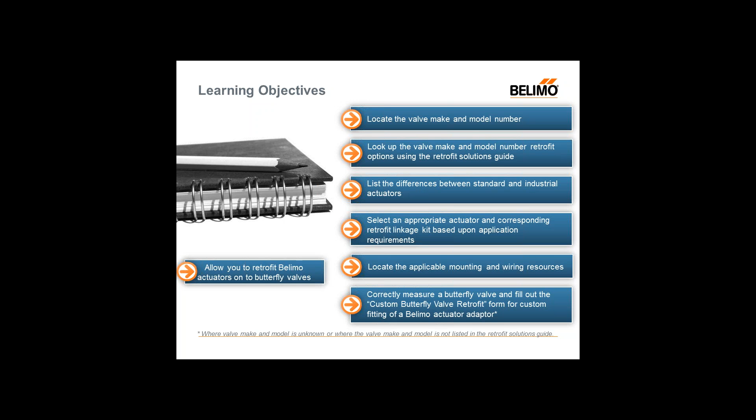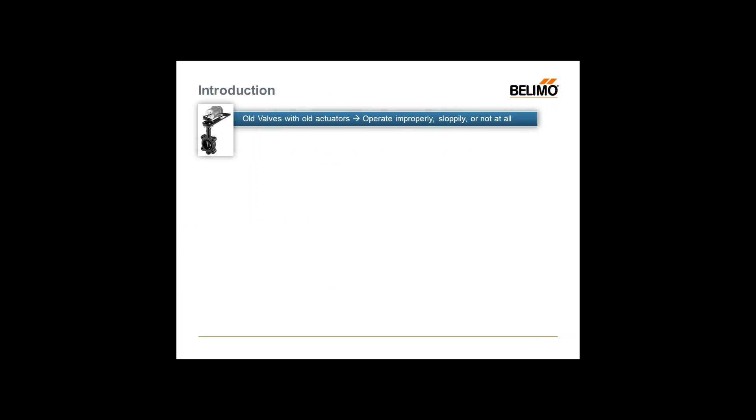So without further ado, we'll talk a little bit about the why, the introduction, or why you might want to retrofit. Of course, there are many reasons. Some could be labor, some could be size. In your building you have all these old valves with old actuators, and some are running improperly, sloppily. They don't run right, they're wasting energy, performance is pretty bad, and you start thinking, why would I retrofit over replacement?

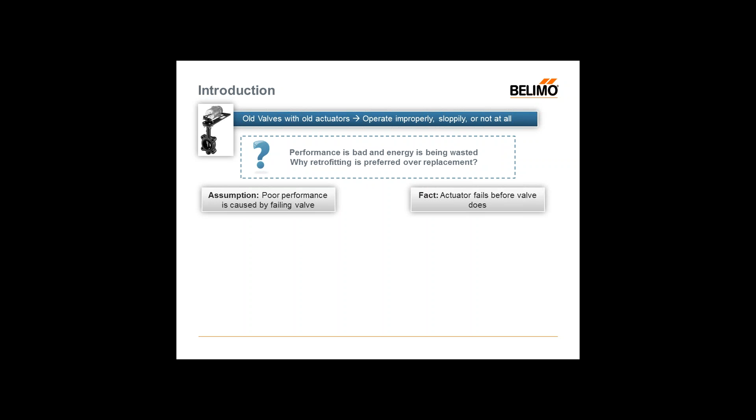There could be a host of reasons why you might want to put in a full replacement, but if we're focusing on retrofit as an option, you start thinking the assumption is that the poor performance is probably caused by the valve, since that's what the media is passing through—that's got to be what's really causing it. But reality is that many times it's the actuator. The valves are pretty robust; most of us in the HVAC market know the valves are very robust as far as longevity. It's the actuator that tends to fail before the valve, after all they are just electronics, or in some cases pneumatic.

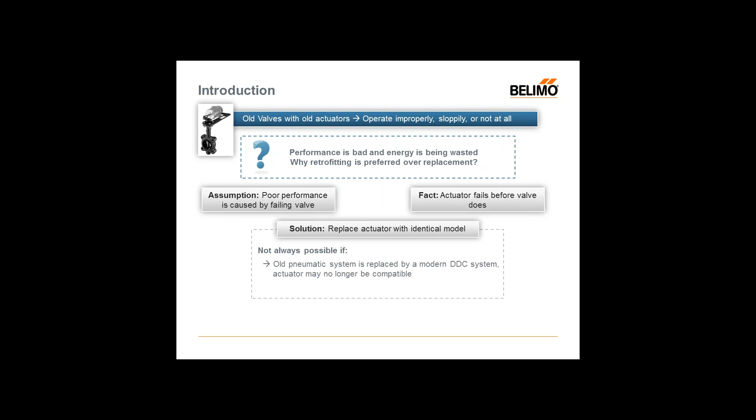So the idea would come to mind: simple solution, replace the actuator with the identical model. Might not always be the case though. Things like going from a pneumatic to a DDC system—there are different transducers you can put into the system, and they're a little bit harder to work with. But if you're updating your whole system to go fully electronic, state-of-the-art, let's say with BACnet and things like that, you might want to reconsider going to a state-of-the-art actuator. Sometimes a lot of these older actuators are obsolete, so just getting a like-for-like when you approach the company—this is the model I have—there might not be a replacement for it.

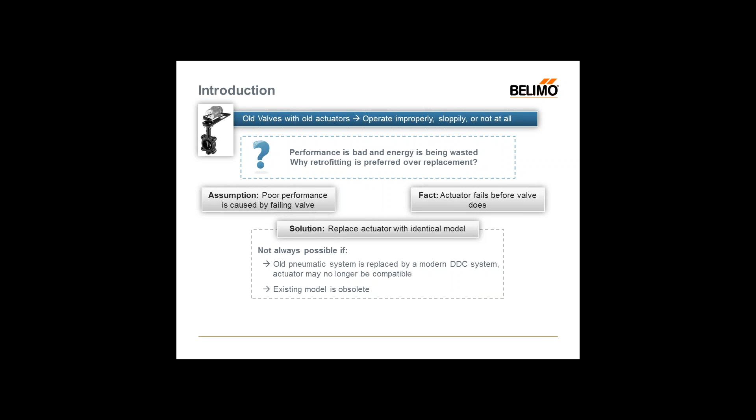The real idea, the bottom line, would be to replace the actuator with something state-of-the-art, maybe energy efficient, get better control, save some water and energy or media, and ultimately have better control of your system. Better control could equal better comfort, and that's really what we're shooting for these days.

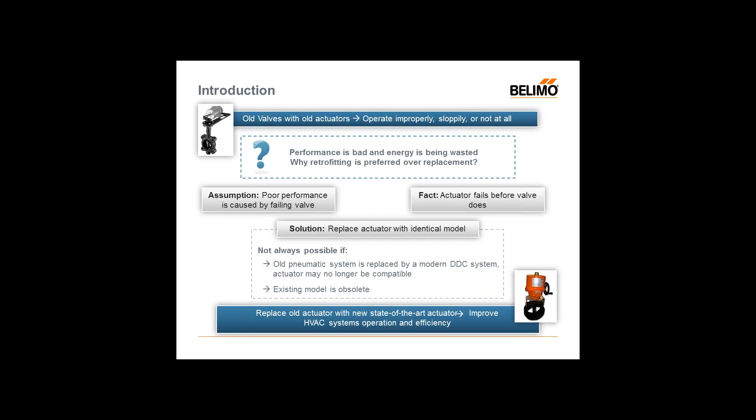So step by step, as far as retrofitting a butterfly valve, these rules kind of apply to any type of valve, whether it's globe or ball valve. It really starts with the valve make and model. We had one of our customers, might be on the line right now, send us an email last night asking about a pneumatic actuator. Although that information is helpful as far as what the actuator was, we really need the valve information. We're going to be choosing or manufacturing a linkage that fits on that valve, so we really need to know everything about the valve, not so much the actuator.

From there, you take that data and go into one of the resources. One is the Retrofit Tech Doc, which you see in the handouts. Another could be our Select Pro software, or even our new Retrofit app. From there, you'll have multiple choices of linkages. You'll take some actuator considerations into account, why you might pick one over the other, then select it and purchase everything. Generally speaking, a lot of our kits are available within 2 to 3 days, unless they're custom—those take about 5 days.

And when you receive it, install the linkage, hopefully in a few minutes, and get your system back up and running with no hassle or downtime—and ultimately, without removing the valve from the system.

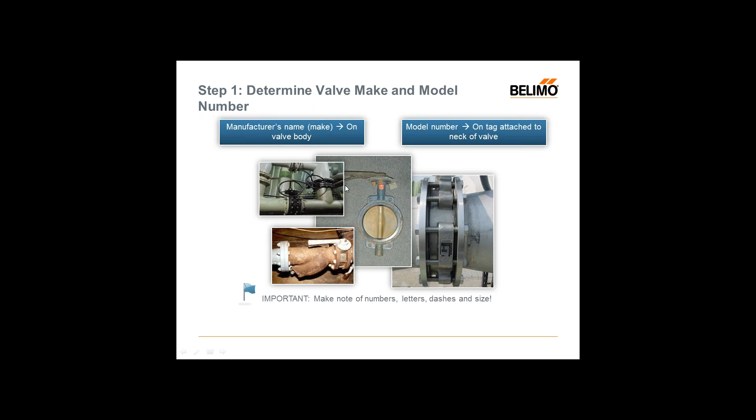So just to show you some of the most common things we have, these would be our UFLK part numbers. The LK signifies that it's a standard linkage kit. I say standard, it's some of the things we have right in our catalog - could be a Keystone Figure 222, very common butterflies in the US, or NIBCO, who have a very large marketplace with butterflies with handles.

And again, if you don't see it in the catalog, there is a backup plan. Just take note, even sometimes the colors - companies like Bray use red quite often. Any of that information that you think might be trivial will definitely help you retrofit.

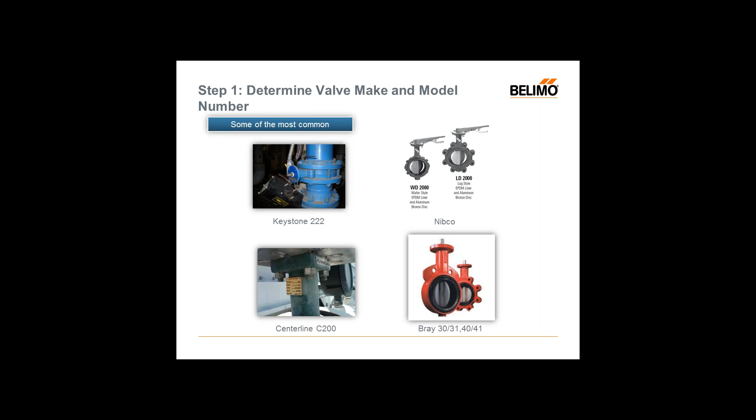From there, you're going to take your information. Today we're going to focus on a Centerline C200. You would look up in the table of contents from the Retrofit Tech Guide - this is the 2015 one you see over here, which is included in the handouts.

You can download it, or you can also email us and we can send it to you free of charge. There is no pricing in there - it's just a reference guide that shows you actuator to actuator retrofits, butterfly, globes, all kinds of good stuff in there. We usually replace it about every year, year and a half, to include the latest kits that we have to offer.

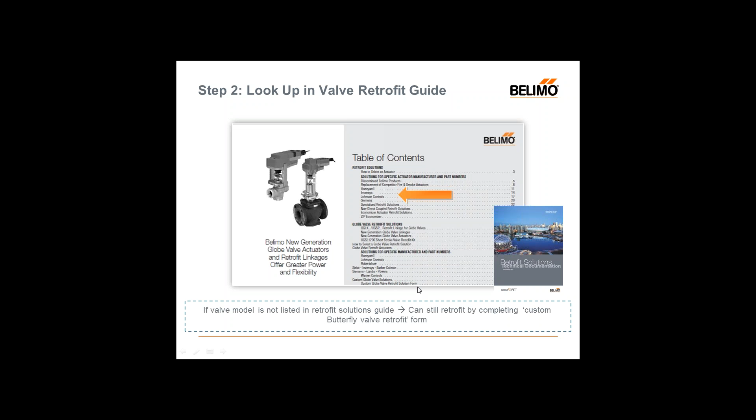So from there, you go in the catalog, find your make and model, and go to the appropriate page. Again, if you don't have the make and model, not to worry. Like we talked about today, we're going to focus on the Centerline C200.

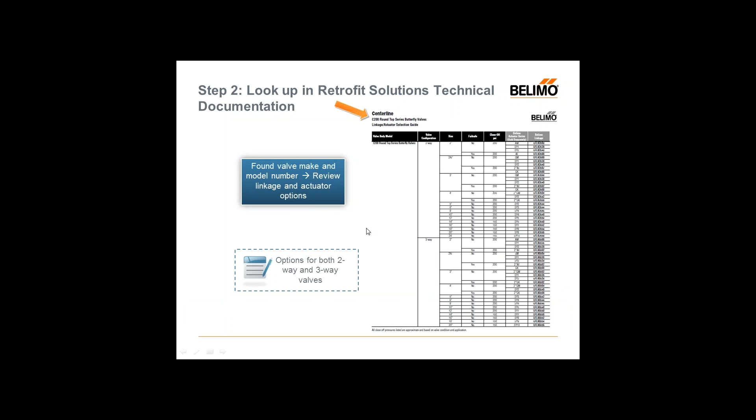In the top pages - or again, if you have Select Pro or our Retrofit app, the same rules apply - you're going to look for make and model, and then whittle yourself all the way down to the linkage kit. Just note that two-way and three-way are broken out separately because those kits are very different.

So in today's example, we're looking at that C200, a round top. You're going to go into the catalog and look to see that it was a two-way, 2.5 inch. We're on the right page.

And you can see there's quite a bit of choices for the linkages - 5 choices in total, some with non-spring and some with spring return, or fail-safe.

For those of you who don't know, fail-safe is when the power goes out, it will go to a fail position. The non-fail-safe would be on a power failure, it would stop right where it is. So again, you're going to look here and see all these choices - we're going to take a look at each one and help decide what we want for our application.

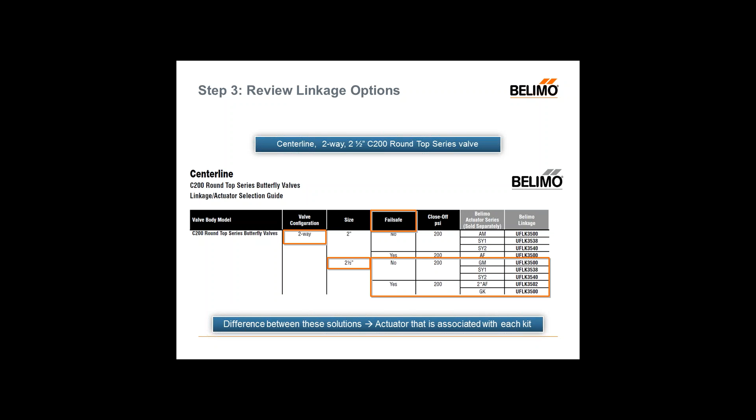So I'll tell you ahead of time - today's example, we're using a Centerline two-way, and I ultimately want to have a non-spring return industrial actuator. So that's what our ultimate goal is today.

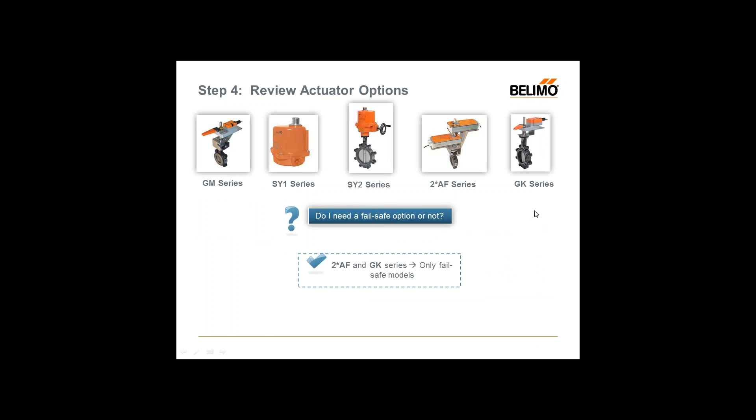So in the catalog selection, you see 5 actuator choices: a GM, SY1, SY2, an AF, or a GK. Now the next question you ask yourself, as you saw in the catalog - do I need fail-safe, yes or no? If I do need fail-safe, the choices are with AF or GK. The F is a spring return, the K is an electronic supercapacitor. And today we're focusing on non-fail.

So now with non-fail, I have choices - GM, SY1, and SY2. One of these, the GM, is a standard airside actuator. The other two, the SYs, are an industrial style actuator. There's differences between both of those also. The standard actuators, like the AF and GM, these are the kits that go along with it - they usually have less torque.

They usually are NEMA 2 rated, which means it cannot be mounted outside. They have slower run times, and generally speaking, unless you order them with an end switch, they do not come standard with an end switch. And some do not even have a choice to put an end switch. So again, these are all considerations you need to think about up front before you select the actuator.

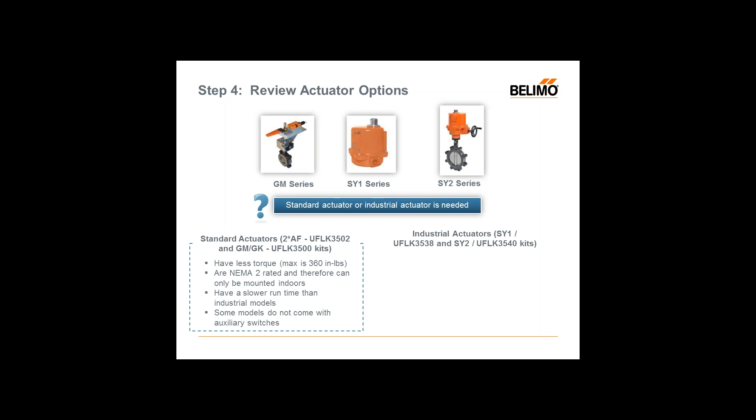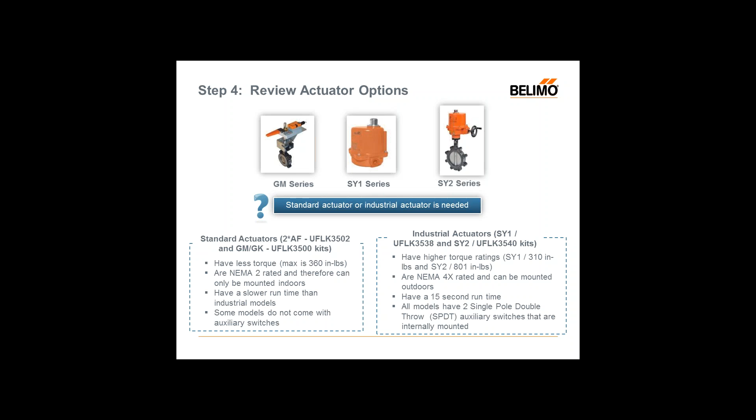On the industrial side, these are the linkage kits with an SY1 or 2. They generally have more force or more torque, which usually yields a higher close-off pressure or gives you a little bit extra. They are NEMA 4 and 4X rated, so they can be outside or in corrosive environments. They usually have a much faster runtime, and they come standard with end switches inside the case. So they're there, available, whether you need them or not. They are actually inside the case, come standard. So those are a real big difference between the two.

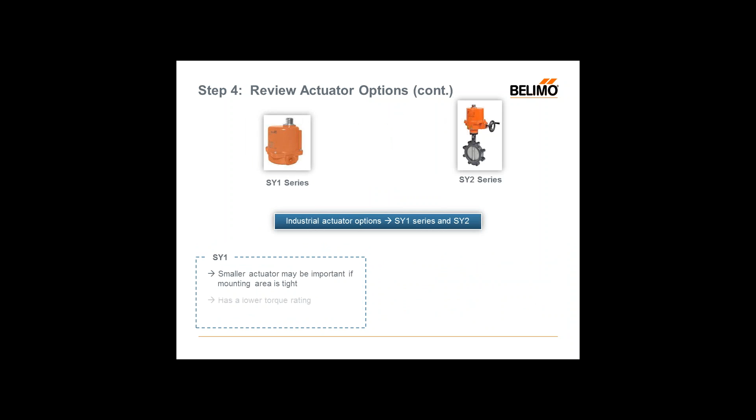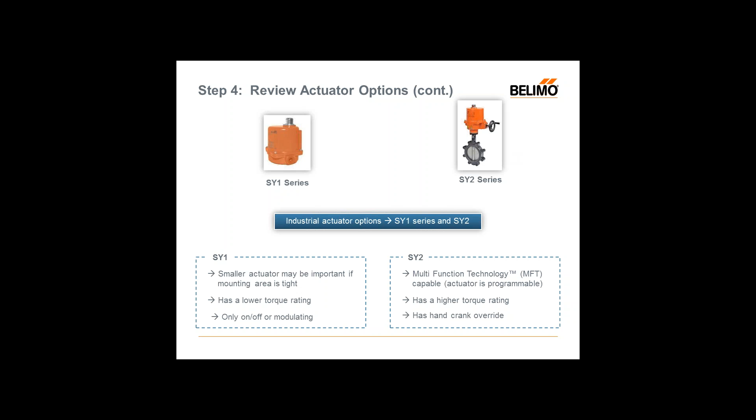So today we wanted to focus, again, I said I wanted an industrial version. Now there's two different versions: an SY1 and an SY2. The SY1 is a little bit smaller, has lower torque, where the SY2 is a little bit bigger. It has MFT functionality, so it can be any control signal you like, has a higher torque rating, and also comes standard with an external override crank. The SY1 only comes in on-off or a modulating 2 to 10. So they're both NEMA 4, they both have end switches, but they're a little bit different between each other also.

So today I wanted non-fail-safe, industrial. I also wanted the override, so I chose the SY2. So what does that mean to us? As we whittled all the way down through the little catalog, we came up with this selection: a UFLK 3540 and an SY2 of your choice, which could be a 24, 110, modulating, on-off. So you have quite a few choices.

All the choices are outlined in the PGPL, our price guide, in the retrofit section. There's also pricing there. In the price catalog, you would see the pricing for this UFLK linkage. An example, this one here might be $300 or $400 list price. An SY could range anywhere between $2,000 and $4,000 list price, depending on the size and features.

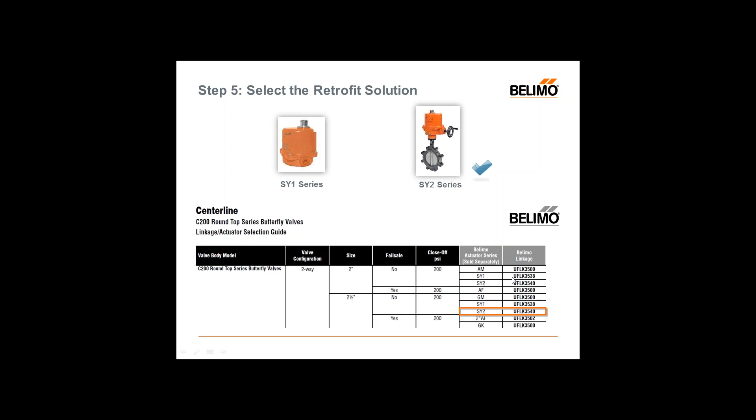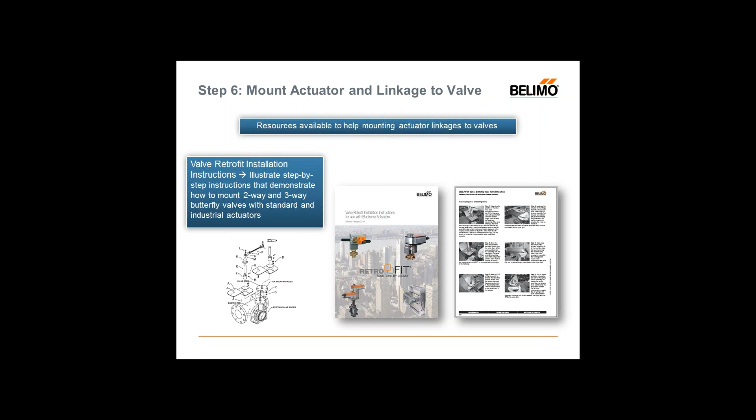For us, we're focusing today on two-way, so you'd look at the top where it would say UFLK, two-way industrial style actuators, and that's where you would find the instruction sheets. Again, I'm just showing a picture here to keep in mind that a two-way and three-way are very different. You get quite a few more pieces on a three-way versus a two-way retrofit.

Again, in this little booklet, it's important to go through it step by step. It'll take you from the starting point of installation all the way through to wiring. And in our case with an SY, there's an additional booklet that comes with the SY that will give you everything you need to know for SY wiring. And just note that they are very different as far as the wiring compared to a standard, let's say, damper style type of actuator.

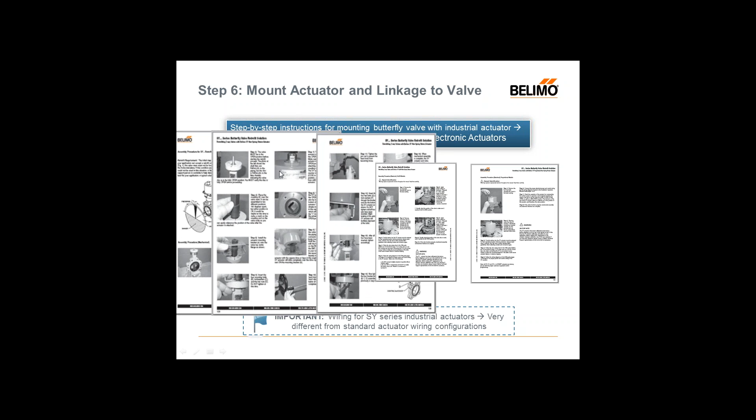The catalog will give you a step-by-step how to install it. It gives you a pictorial with some wording as far as mounting the linkage kit, some special considerations, and some wiring and setup. All of this information will come with your retrofit kit.

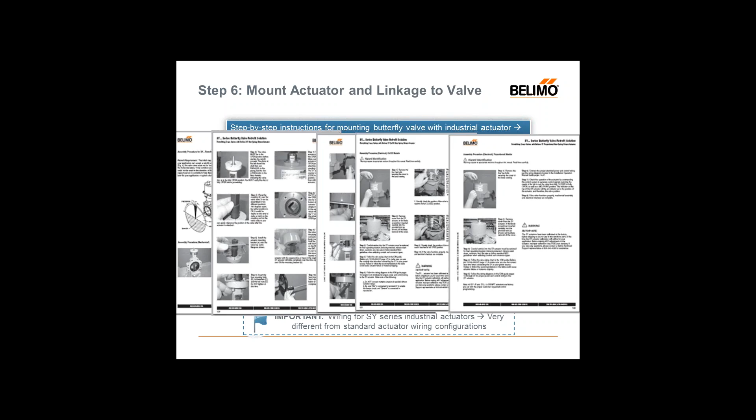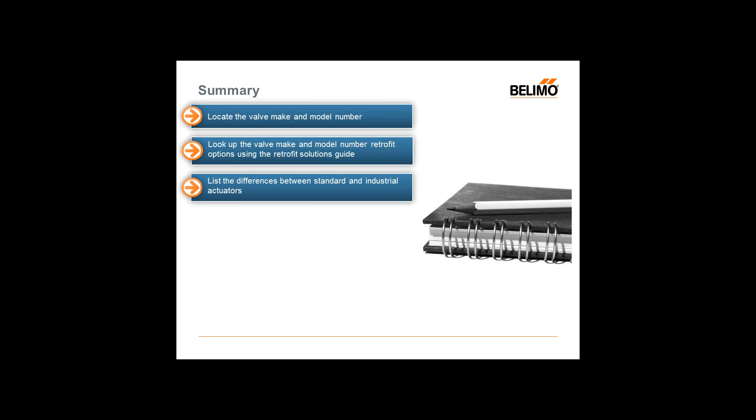So, thus far we've taken a look at locating make and model, where to find this information and how important it is. We looked it up in the catalog, or the Retrofit Solutions Guide. We looked at some of the different linkage choices and actuator choices, just to see what's different between them and why you might pick one over the other. And then we took a little look at the resources that come with the linkages for mounting.

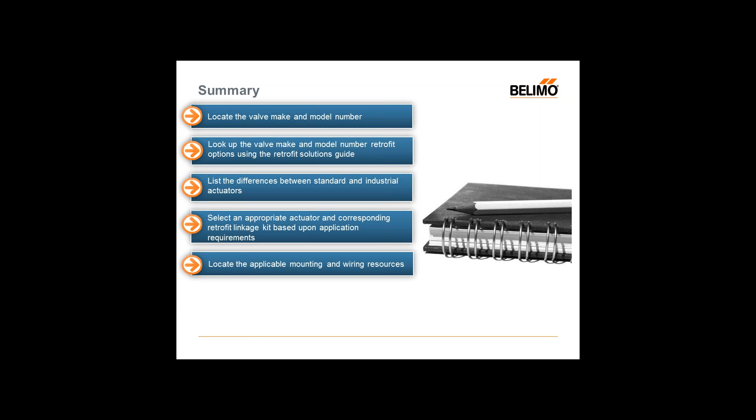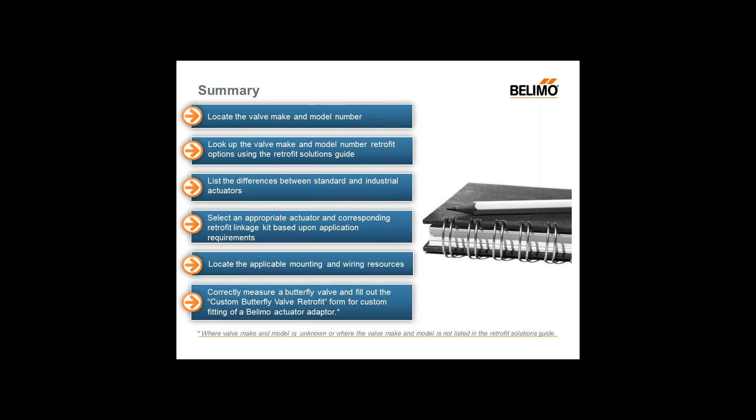So lastly, if you don't have the make and model, or you notice that it's a Bray, but it's not one of the choices that are in our catalog, we have the backup plan, which is our custom solutions, which does require a retrofit form, and we're going to go through now how to properly fill out the form.

So, some things to think about in the beginning when you come across this valve for a custom solution. Is it a two-way or three-way? What are my height requirements? Just know that some of these linkages can be tall. Some of the actuators, like the SY, need a good 12, 13 inches to remove the cover. So you want to consider this before you start thinking to retrofit that valve.

Valve size and valve orientation. Does it come out to the left? Does it mount upside down? There's limitations to certain actuators.

So again, this only really pertains if the make and model is not available, or the model is not available, or one of our salespeople, unfortunately, went in there the day before and pulled off the valve tag. This is a way you can find it.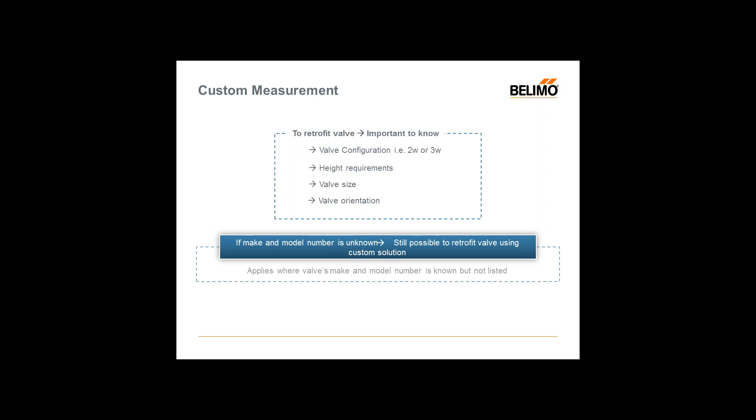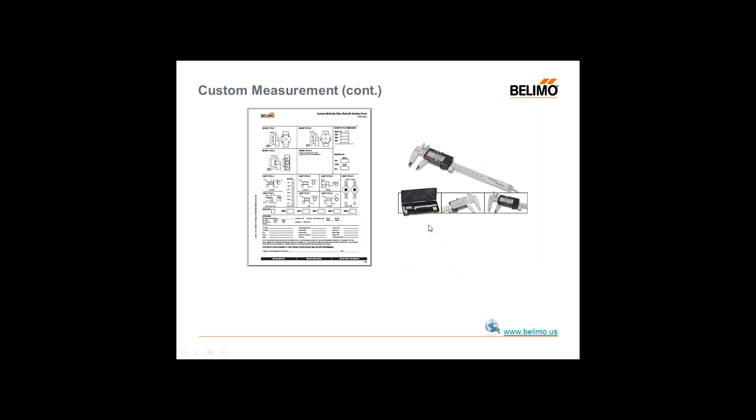So, filling out the form, there's one of these forms located on our website. It's located in the catalogs. This is the custom retrofit form for butterfly. There is also one for a ball valve and a globe valve. What you're going to want to do is get yourself a set of calipers. All of our linkage kits, you're going to take the dimension right off the valve.

There are cases that we do build a linkage on top of a linkage. If you really don't want to mess with the linkage, maybe it's part of the packing, or maybe there's some asbestos covering the insulation. Not to worry, we can build a linkage on top of someone else's linkage. But you're going to take this information right off the valve, not the actuator. Again, the actuator helps us, but that's not what we need.

And I say a caliper because we're machining it here in our Belimo machine shop to the nearest thousandth of an inch. So when you send us this information, we're going to design the kit custom, a one-up solution for your valve. So it's important that you take it with a caliper, not something like a tape measure.

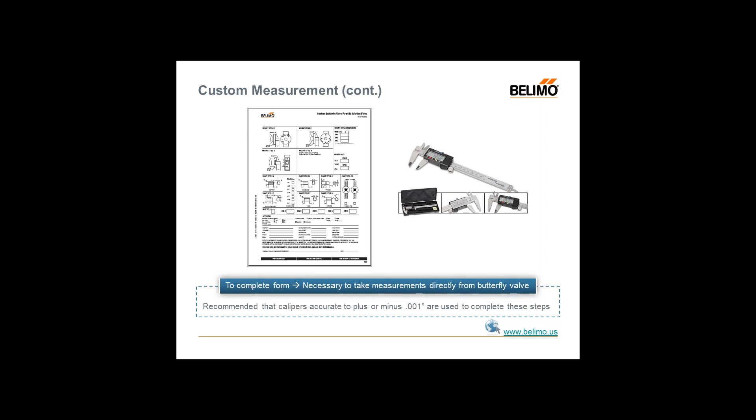We want to see the form preferably filled out with decimal places, not so much fractions, because one of the biggest notes to mention here is that the custom kits are not returnable. They are a one-up solution. You can see it right on the form here. They are not a returnable solution. Of course, we will work with you if we have to modify something and get it to work for you.

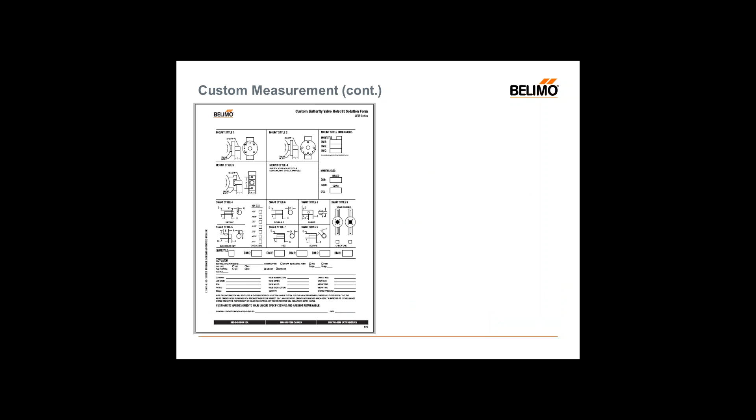What to fill out? What's important? One of the first things is the mount style. That's going to be the overall bolt pattern of the valve. As you can see, we included some of the most common: a 4-bolt, square, diamond, 2-bolt. If yours isn't shown at all, feel free to draw a little picture here. The more information you give, the better your retrofit will go.

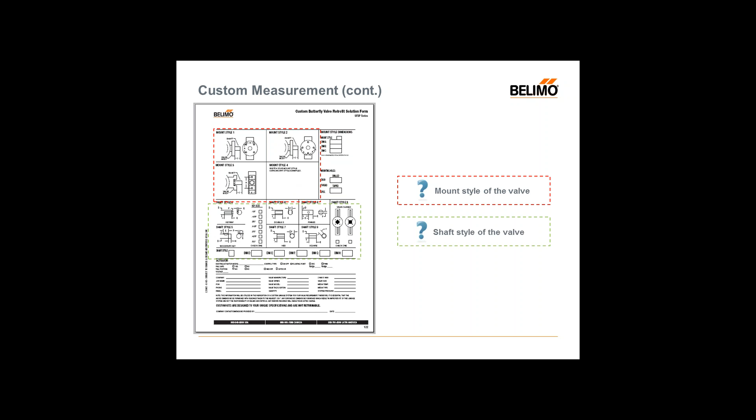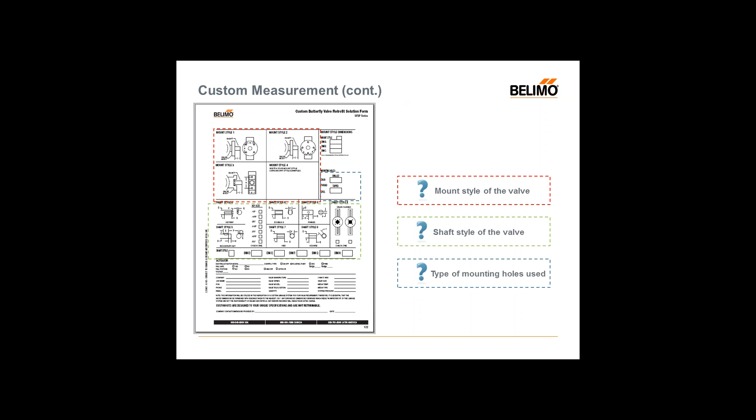Shaft style. Tell us a little bit about the shaft style. We can machine just about anything here. We have a wire EDM machine. So I can cut an octagon, a hexagon, keyway, let us know what you have. And mounting holes. Some butterflies have a drilled hole, some are tapped. So we can supply the bolts, or you can reuse the bolts, but that's also very important. So we're going to take a look at each one of these sections one by one and how to fill them out.

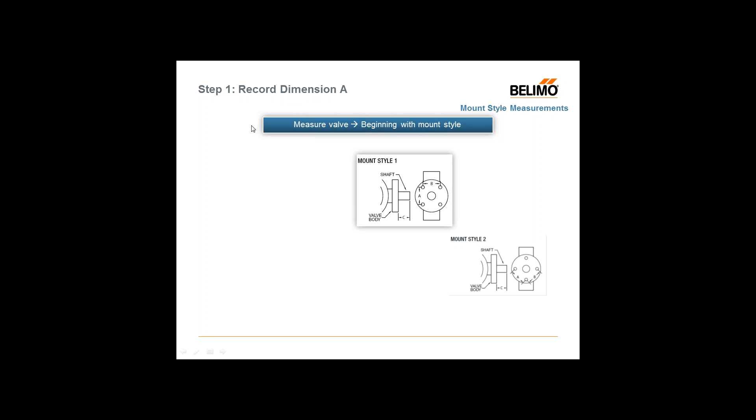So in our example today, we're going to look at a mount style 1, which is just a bolt hole pattern that's in a square type. On the chart, you're going to see the dimensions that we fill out. In this case, mount style 1. Next, we're going to look at dimension A, which is from here to here, and we're going to fill that in. Next, you'll fill out dimension B, which would be from here to here. And lastly, dimension C, which is the length of the shaft, as you can see here.

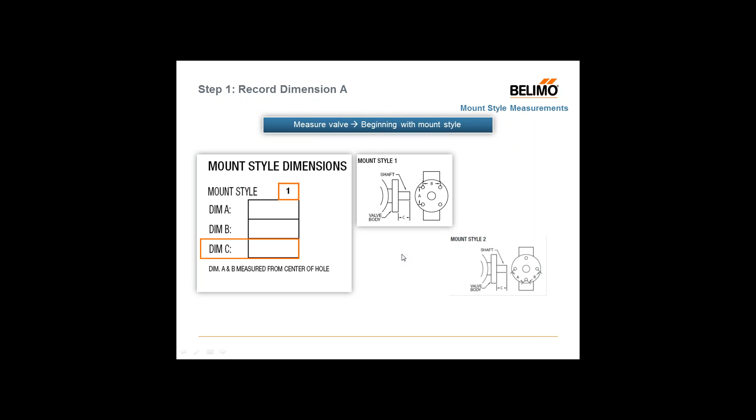And I'm going to go a little bit into each one of these so you can really see what it is. Just note that you're taking the dimension from the center to center of the hole. So either with the pointy section of the caliper, or if you have dowel pins to fit in there, you can measure from outside to outside and then subtract the diameter. That's another trick that works well. Okay? So in our example, we're going to 1 3/4. That's what I got for dimension A, and I fill it in.

Again, here's a real-world picture of what we're looking at for the mount style. Now, dimension B, we're going to measure that. In this case, we got 1 3/4 also. In many cases, A and B are the same. Some cases they're not. It might be a rectangle, but in this case, it is the same.

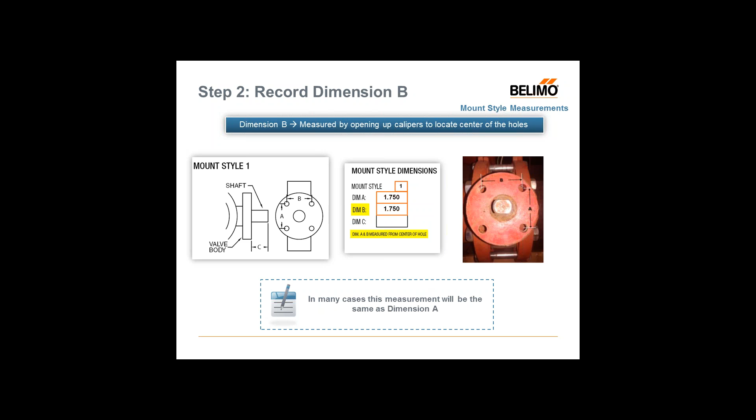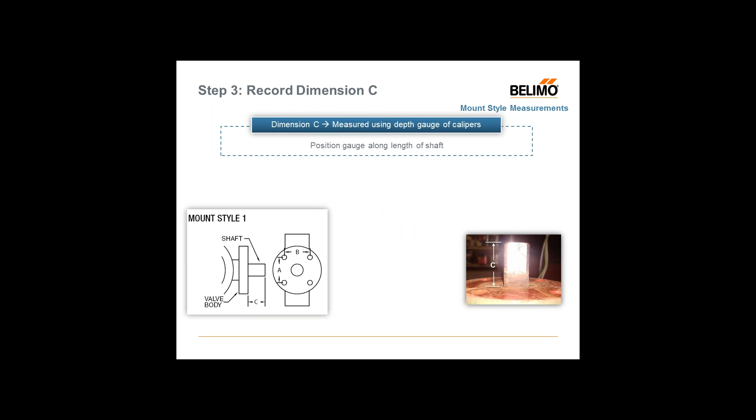Dimension C. Dimension C is the length of the shaft sticking out. This is the little piece where we're going to attach a coupler that creates the interface between your valve and our actuator. You're going to take the long end of the caliper, and as you open the caliper, a little pin will stick out, and you're going to measure it from the base to the top. The length of that little pin sticking out will give you the length of the shaft. And again, in our example, we're using 1 1/4, 1.250.

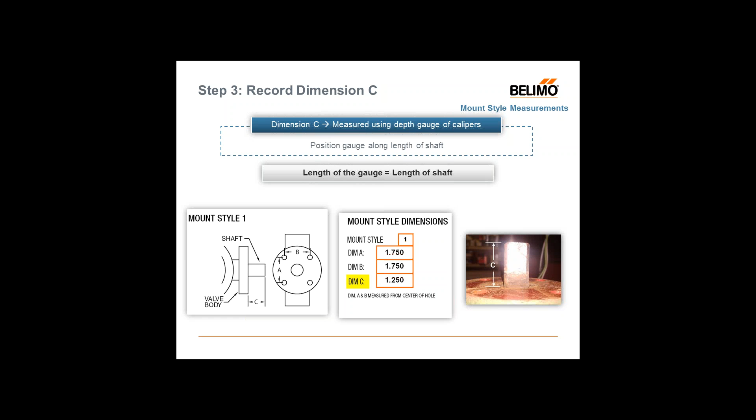So, dimension D. Again, for our example, I'm using shaft style 6, what they call a double D.

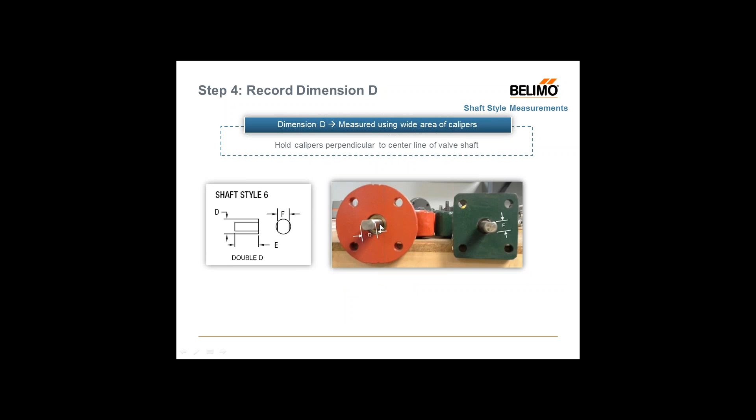You're going to open up the caliper, and you're going to put it across the total diameter of that valve shaft. You can see it here, and also here in a real pictorial. And we're going to jot that down. In our case, it is 0.625.

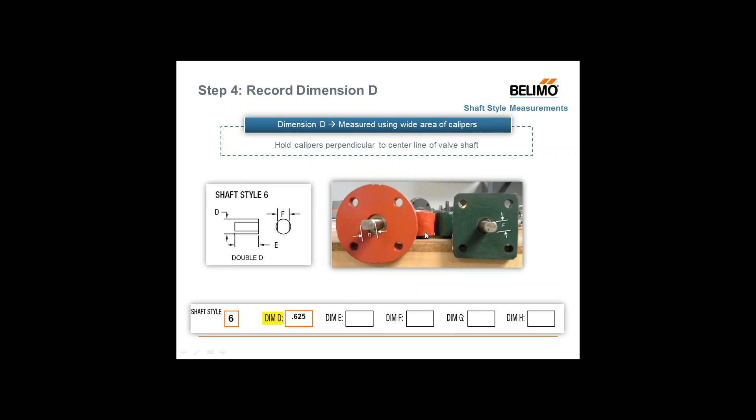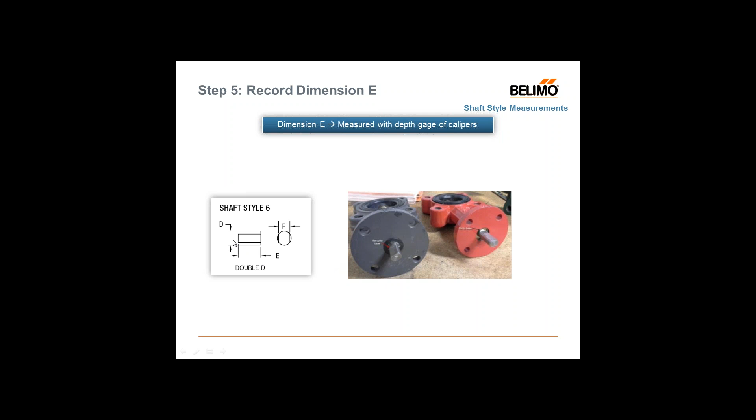Next, we're going to look at dimension E. Dimension E is the length of that flat as it goes down the shaft. Now, it's important to know that sometimes this dimension E does not travel the full length of the shaft. It could stop short. And in our example, it does stop short.

1.25 was how long dimension C was, the full length of the shaft. In this case, the flat ends just shy of the bearing, only at 1.10. This is really important so the coupler sits down. Either it will sit up higher or it will bottom out.

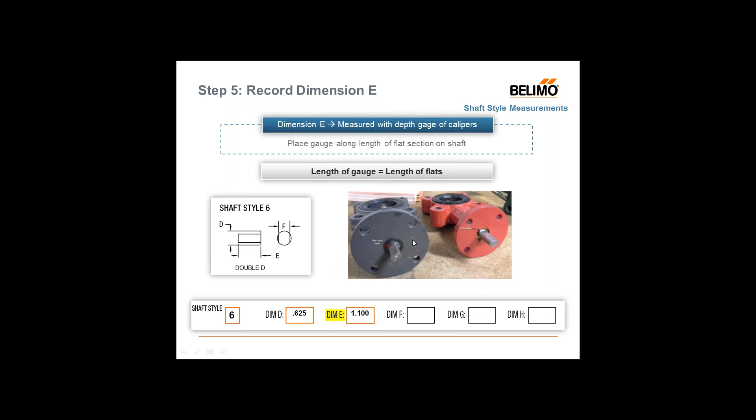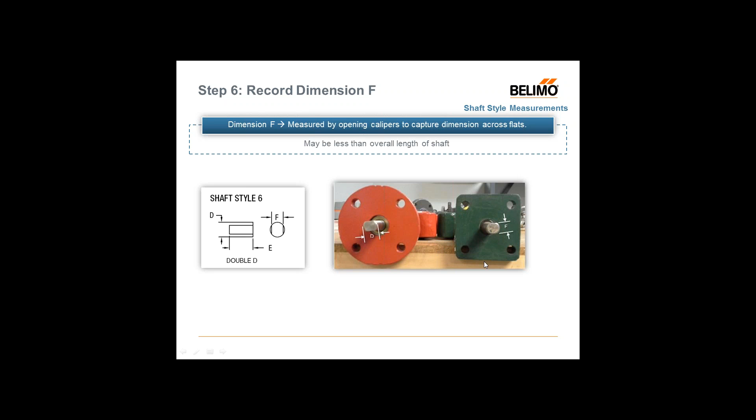Lastly is dimension F, which is the diameter of the flats. Again, you're going to open up the caliper and measure these flats. You can see it here and also over here in the picture. We're going to jot that down, 0.437. Any other dimensions that you're not using, you could just write NA or put a line through it. They usually are pertaining to other shaft styles like a hexagon or a keyway.

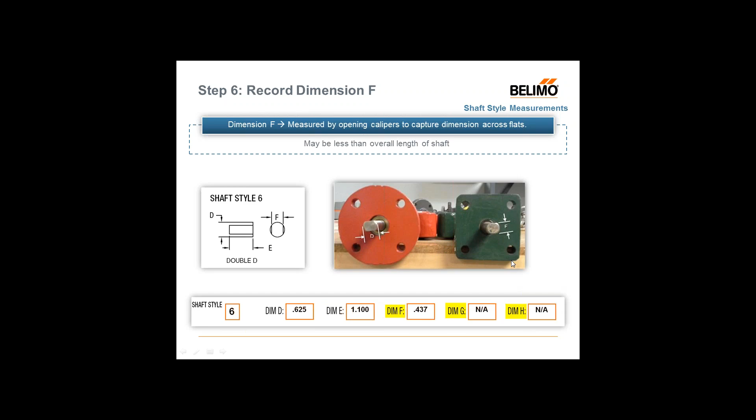So from there, we filled out everything on the valve. The last little bit of information, which is very helpful, is about the actuator that was either currently there or what you're looking for. Just like we looked at before, for a standard kit, what kind of actuator do you need? Indoor, outdoor, VDC, fail-safe.

We also need to know a little bit about the valve. Although the make and model might be missing, anything you can give us, particularly in this section, is very important. The two-way, if it's a three-way, the size, the media pressure. There's no need for us to give you a very large actuator if you only have a 2.5-inch butterfly that's low-pressure steam. So all that information helps us come to the right conclusion and the most economical solution for your retrofit.

If you're filling out this form online in our retrofit resources, there's a submit button. If you push the submit button, it will send this form to our tech support where we can process it. I would stress to everyone when you fill out the form, especially today with digital cameras and our cell phones, take a couple pictures of what's going on. It will help us greatly, especially if the job site is quite far away.

From there, they'll get the form, and we'll process it, and we'll give you back a quotation or send you to one of our distributors for a quotation with a UFSP number. This is for Butterfly Special. That's what the SP stands for. It means it's a custom linkage as opposed to the LK, which is one of our standard linkages that come right out of the catalog. The special linkages, again, take anywhere between 5 or even 7 days if they're very elaborate.

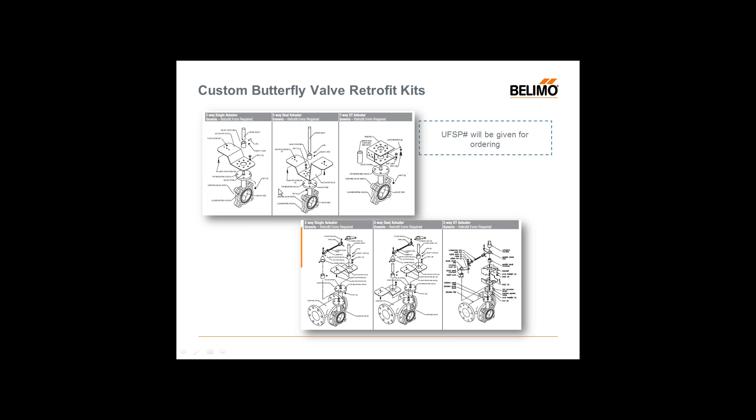And these are some of the pictures of the linkages, what you might receive. These are for two ways, either single, double with an SY, some of the three ways with a single, a double, or an SY. And all the prices, again, they vary between simple and complex.

One of my main things is don't shy away from virtually anything. If there's a pipe above your valve, if it's underneath a cooling tower and you need to put something in there, there generally is a way. We can make all kinds of custom linkages that can be on there. Some of them can be quite expensive, like one of these offsets, and take about 5 or 7 days. But I assure you, you will be able to retrofit that valve without losing any downtime.

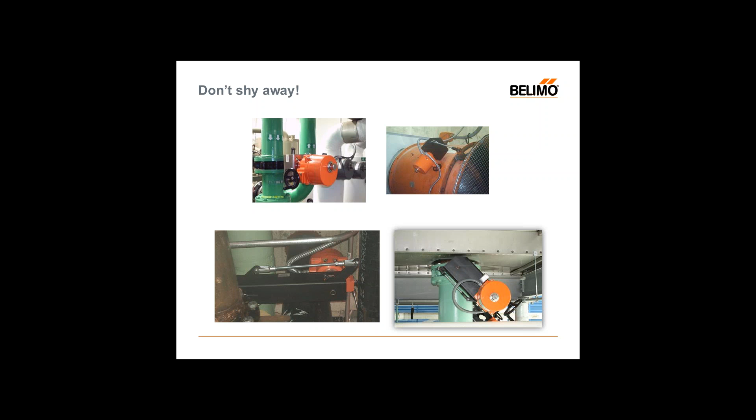If you get equipment that was sent to you without any actuation by someone else's brand, make, and model, not to worry, we can put a linkage on it. So really the point of this slide is don't shy away. Sky's the limit. There's many resources out there to help you do these retrofits.

Anything from the tech book, which is in the handouts. We have a retrofit app available now for iPhone and Android, and also iPad. And it'll work the same way as we looked at today. You would select water, Butterfly, Centerline, and it'll tell you what linkage to purchase. A lot of the standard linkages are available online.

There's YouTube videos. All of our retrofits are in Select Pro. There's Belimo 101 modules for Butterfly or Globe. And another topic, fire and smoke retrofits. That's another very big topic and totally available to you. All these resources can be located on belimo.us.